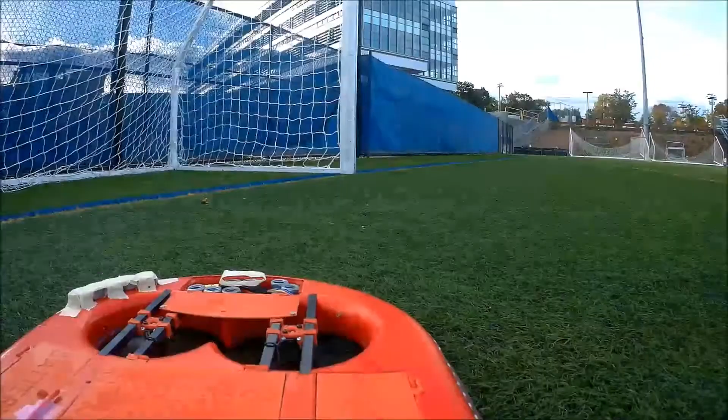Hi guys, so this is my newest hovercraft. I started working on it last year but never ended up finishing it. It's not a full-scale person-holding hovercraft, it's just RC, but I'm hoping to get it around 60 to 70 miles an hour once it's finished.

We got a few special things in this. We got some nice 3D printed covers that protect the batteries. They're nice and held down by magnets, which is pretty awesome. Got a few of them, one up front, two on the sides, and one in here for mostly electrical components.

We're going to have some ESCs mounted right there for powering two enormous EDFs in the back, which are going to provide the thrust for this hovercraft.

We also got two downwards fans. These downwards fans produce the lift for the hovercraft and cause it to kind of hover on the ground. You have two fans spinning in opposite directions to cancel out the angular momentum so it doesn't spin to one side. My last RC hovercraft only had one downwards fan and it kind of tilted to one side when you're driving it, which is kind of annoying.

So hopefully having two going in opposite directions will solve that problem. They're pretty nice, we got carbon fiber propellers, carbon fiber mounts, so it's pretty lightweight and should provide plenty of downwards thrust. We also got some nice LEDs going around the whole outside of the hovercraft. Those are going to look pretty awesome, they change all different colors and flash. Can't wait to see that.

And we also got a skirt made out of PVC backed polyester. I've used this in some other hovercrafts and it worked pretty well, so it should work pretty well in this also. It's not finished being sewn yet, but I'll get to that soon.

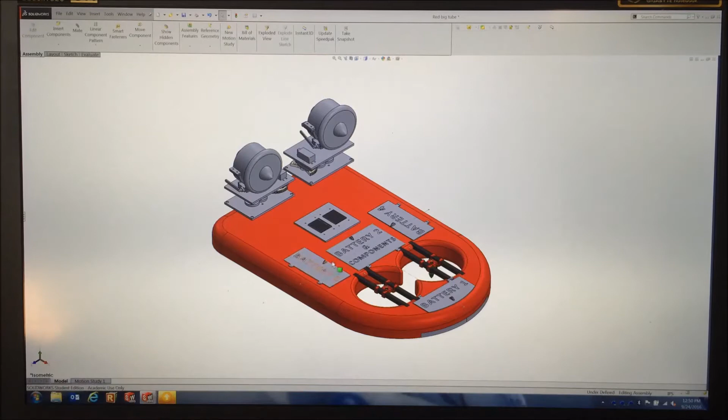So a while back I drew up the whole hovercraft in SolidWorks to make it a little bit easier to build. It's not exactly the same as the one I've built — the thrust system on this is a little bit outdated, but this is what it's about looking like. We got the two giant EDFs in the back, a gear system down here that turns them. The gear system is now different, I'm going to show you the assembly of that in a second.

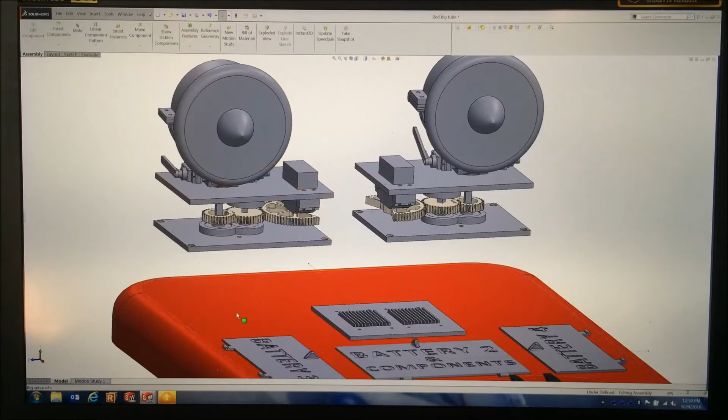Now these two plates are going to sandwich the actual 2-inch foam body, because in the actual built hovercraft I have cutouts right here, and then these things slide into them and get compressed using screws.

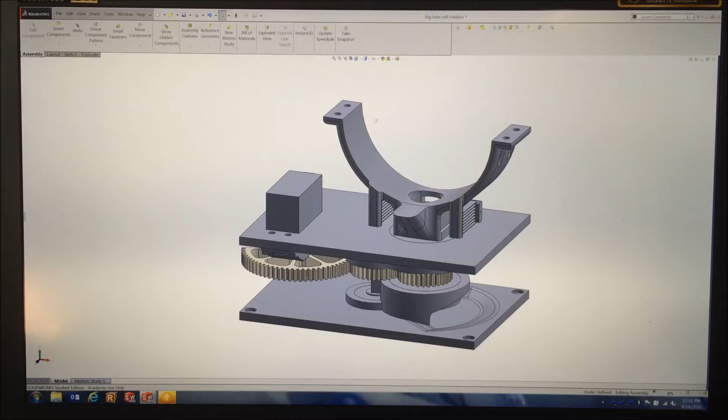But now the other drawing I have of the new system is right here. I didn't make the whole thing inside SolidWorks, it wasn't really worth it. The EDF would go right here, but we got cables that can now go down the inside of the pipe — it's a much larger 20mm carbon fiber pipe — and then come out to the bottom.

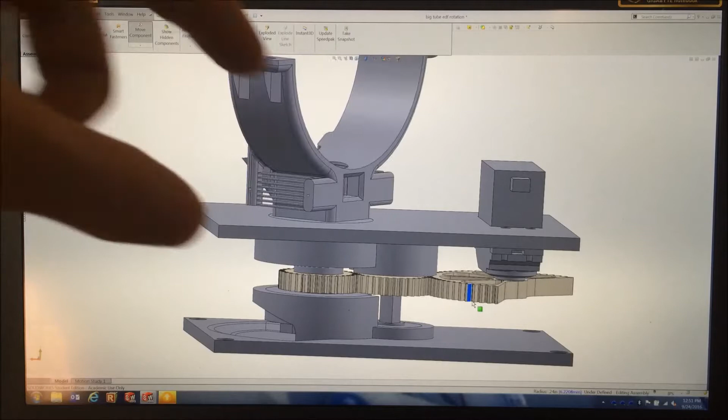So now when this thing turns, I can actually animate this — the wires will actually be twisting inside the center tube. Instead, the old hovercraft had them coming out and swirling, almost like a spring around the outside of the hovercraft, and that did not work well when it's trying to spin 360 degrees.

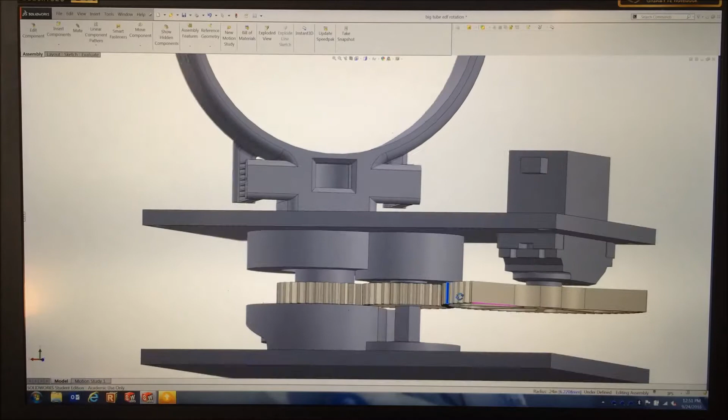I got a slightly different gear ratio here too than the other one. The other one was doing 180 revolutions on the servo to 720 on the actual EDF section, which was way too much — the servo couldn't handle it, it didn't have enough resolution. So I've designed this one so that it spins 180 and this one spins around 360.

I had to actually take apart this servo to make it spin 180 and put some resistors in there, but it's not that bad if you guys are looking into doing that. It does give you a lot more movement. And then the wires will come out through this little gap right here and spin a lot less.

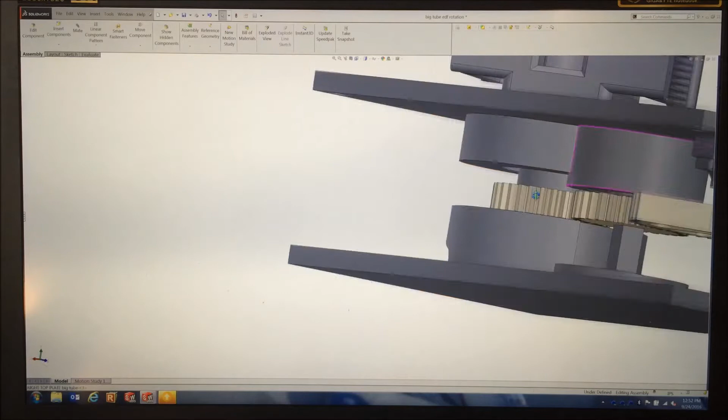These are a bunch of bearings to help it spin a little easier. That's the SolidWorks drawings, pretty cool. Also, this is not in the actual part - these are support material I generate myself in SolidWorks since I don't have support material when 3D printing, and I break it off afterwards. Worked pretty well.

Now I actually finished 3D printing all of this, so next I'll show you what I've actually made.

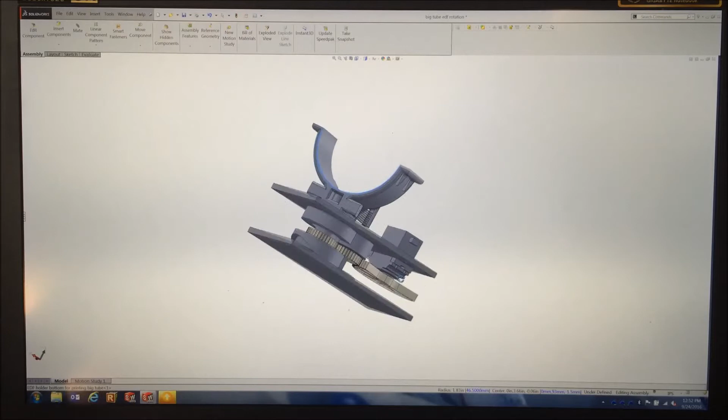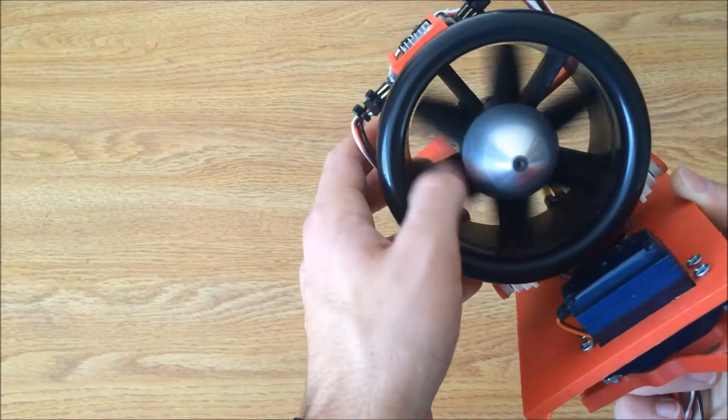So here's the mostly completed EDF propulsion system. We got the big, about 100mm EDF here. It can now put out almost 2 kilograms, just under 5 pounds of thrust, which is pretty intense, and it should propel the hovercraft pretty fast.

This one's a little more complicated than the second EDF - it actually has a gyroscope on it. This gyroscope is going to control the aileron and elevon on the hovercraft to make it a little more stable, by controlling these fins back here, which should help make the hovercraft less likely to flip over.

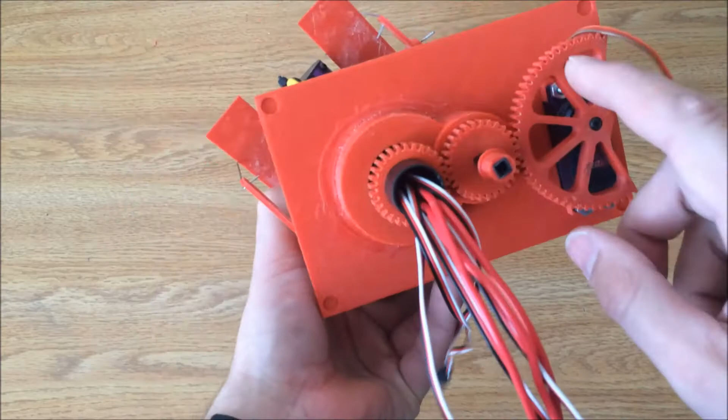This whole assembly can rotate 360 degrees, and all the wires coming off it travel right down through this pipe and out the bottom. You can see our gear ratios connected to the whole servo system that causes it to rotate - I showed you that in SolidWorks already.

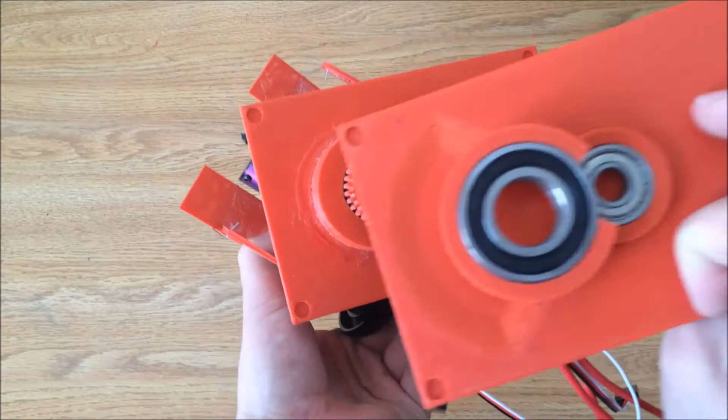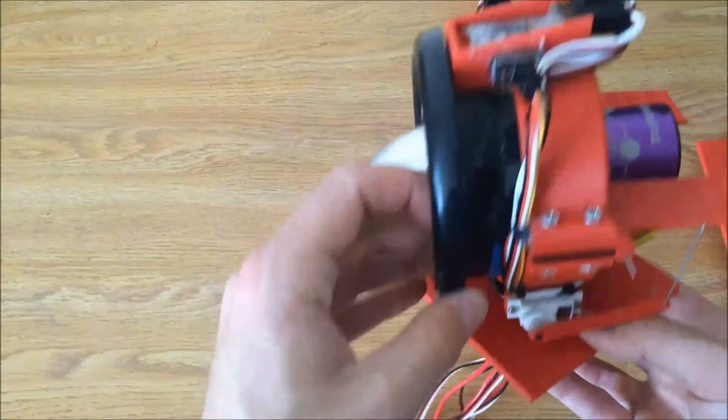That is going to be threaded through this bottom plate here, and the wires come out the bottom of that bearing and spin pretty freely. Again, these two plates are going to be compressed against each other and squish the foam part of the hovercraft to make it stable. It's a pretty cool system - SolidWorks helped a lot making it, and hopefully it works pretty well.

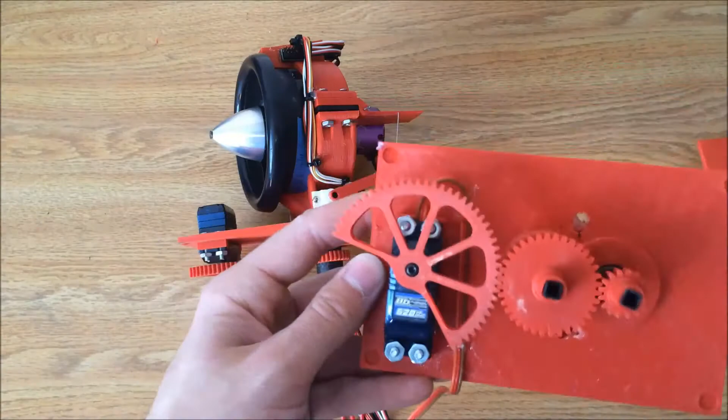Looks pretty intense actually. This is the older system right here, a tad different gear ratio, but I had to redesign it a lot because it wasn't powerful enough and spun too much. See, it's a much smaller centerpiece and I couldn't get any cables run down there. Like I said before, it used to come around the whole outside like this and twist and untwist that cable. It's kind of hard to explain, but this design is much better, and hopefully will work much better too.

There we go. Now I gotta install it in the hovercraft and see if it actually works. So stay tuned for that.

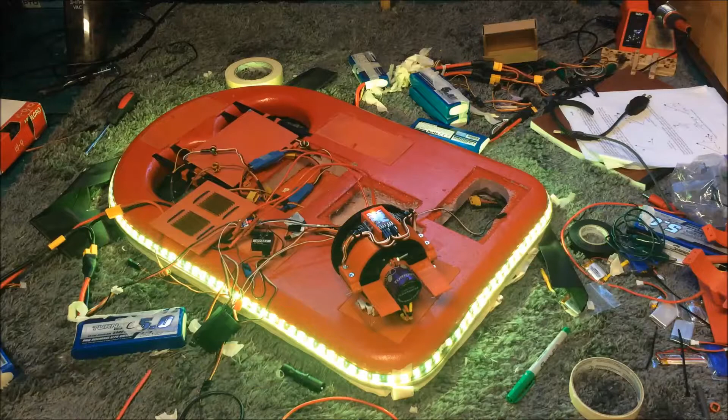So I just finished wiring this whole entire EDF. It was a real pain trying to deal with this many wires in such a confined space, but the good news is it actually works. We got the spinning, not as much as I wanted, almost 360. The servo's a little underpowered, but it's not bad.

But now we got this guy too. So I finished wiring up both EDFs - they both work very well. You could see it moving a little bit in the time lapse, but not that well.

The problem though is they draw a lot of current. Both of these servos, since they're under a lot of stress trying to turn these things, and a lot of wires are causing them to need more strength, it's pulling a lot more amps through the battery elimination circuit. I was running all the components on the hovercraft from one of these little 30 amp ESCs with a 3 amp BEC on it, and that thing got so hot - I'm surprised it didn't burn out. I couldn't touch it for like 20 minutes.

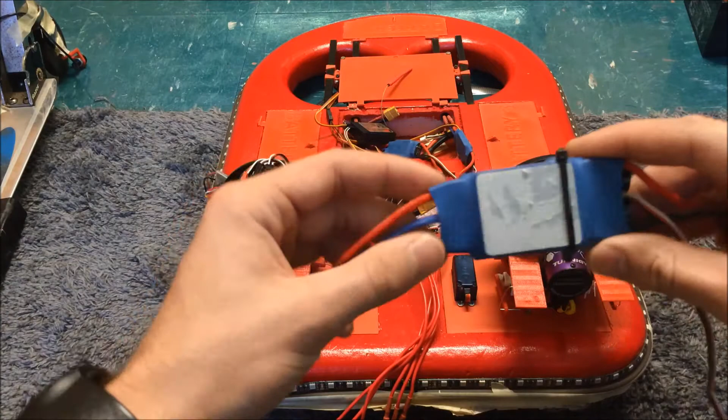So happily it didn't burn out, and I tried it with a bigger ESC with a 4 amp BEC, just using it as a BEC, not actually running anything off of it. And that too got super hot.

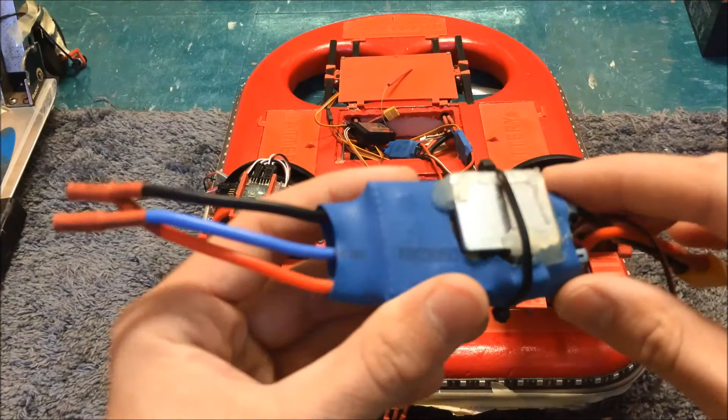Instead of buying a bigger ESC, since I don't have any that output more than 5 amps or more than 4 amps for the BEC, I took this one apart a little bit and attached a heatsink to the BEC component on the ESC, and it works pretty well. It gets a little warm after about 5 minutes of use, but before I was almost burning myself touching it. This should work well enough until I have time to buy a second battery just for powering the receiver and all the components. That's my little fix with a hot glue gun and an old heatsink laying around, and it works pretty well.

So if you're wondering why I am using two different gyroscopes, this is why.

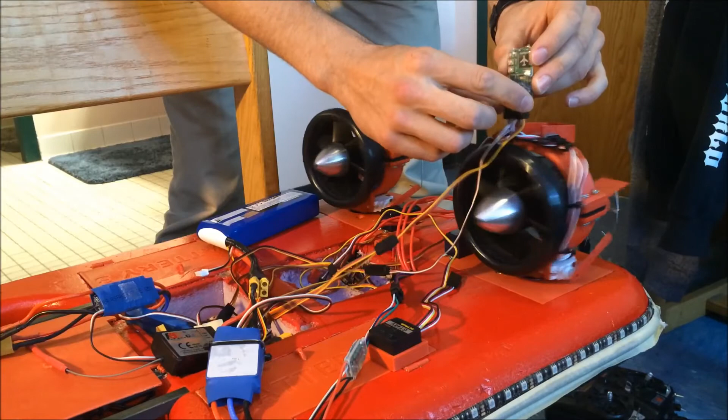After I visualized it, it was feeding back to itself over and over again, so it flips out and doesn't know what it's doing. By having one gyroscope on this to control the flaps on the back, and having one on the actual hovercraft that controls the rudder with these two, you get a lot more stability that way, and none of the rapid feedback making your thing freak out like that. So that's why I'm using two different gyroscopes - this one's a 3-axis, this one's only a 1-axis. It should work pretty well, I think, though I haven't really tried it yet.

So I finished the hovercraft about a week ago. I haven't had too much time to test it really. I did test it one time overnight, but I didn't get any good video because it was really dark out. Hopefully this weekend I'll get some good footage of it driving around. Everything worked out pretty well. I got the nice lights on here. Sadly, the lights no longer flash like they did in the video because I accidentally caught the controller on fire that controlled that. I might try to add it in the future, we'll see, but the wiring didn't really work correctly with my ESCs, so it might not work in the future. We'll see.

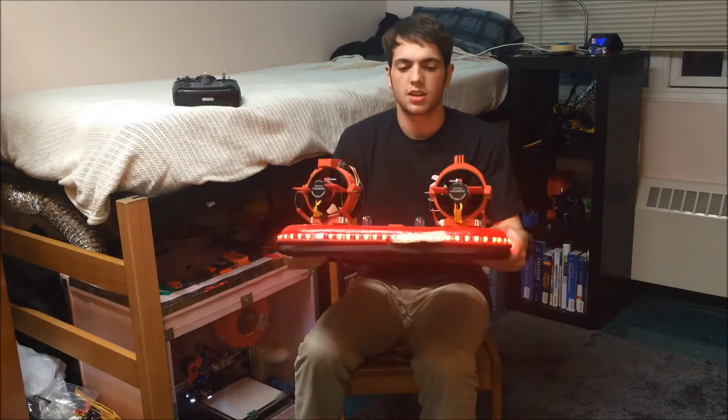But everything else works fine. I got the hovercraft skirt all sewn on the bottom. Works pretty well. I added a special tension ring around the bottom, something new I've tried, and it seems to work pretty well. I got all the EDFs working, the gyroscopes - as you can see when I move them, they help correct the hovercraft. This is it working with the rudder, and in the back we've got upwards and downwards force, if you can see it like that. And if we roll, those two at the end also spin, which is pretty cool. If you get all three, it gets really crazy. It's so cool.

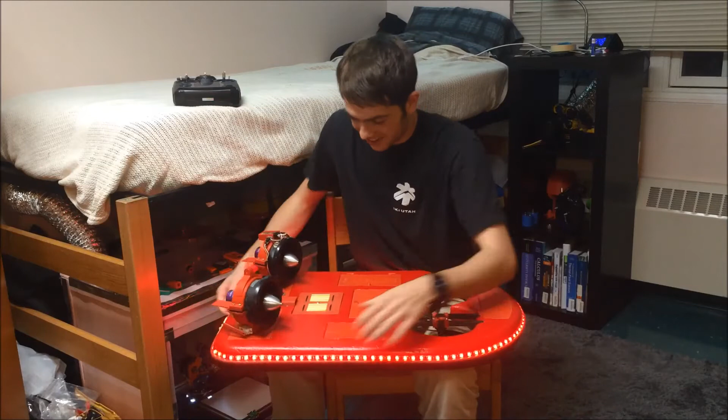But we also have the two downwards fans right here. That worked just fine. And the two back ones - oh god, this is gonna be... I can't do these full throttle, they're a little scary. Actually, they will. Let's see, ready?

They're pretty powerful, but yeah, this thing worked great. When I tested it the other night, it was flying around like crazy. I didn't get good video of it, but I'll try it again soon. I did try it again in daytime, but these things output so much thrust that it started breaking the mount I had. Also, I kind of crashed into a wall at like 30 miles an hour, which probably isn't good. I think I actually have video of that, so maybe I'll post that in this video. I kind of broke one of the mounts from one of these things, so I'm going to have to redesign that again. But besides that, it worked really, really well. I am really, really impressed on how it worked.